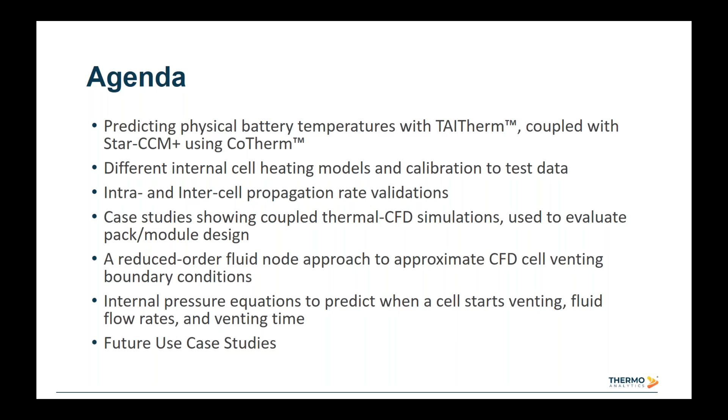Thermal runaway can happen when the battery temperature gets too high, either due to external temperatures being driven too high or from a sudden short circuit. And international law prescribes a minimum time of 5 minutes between the start of thermal runaway and for the car to catch fire, or for the thermal runaway event to pose danger to the occupants of the vehicle. So this requires proper thermal management and heat propagation management, both inside the pack and outside the pack.

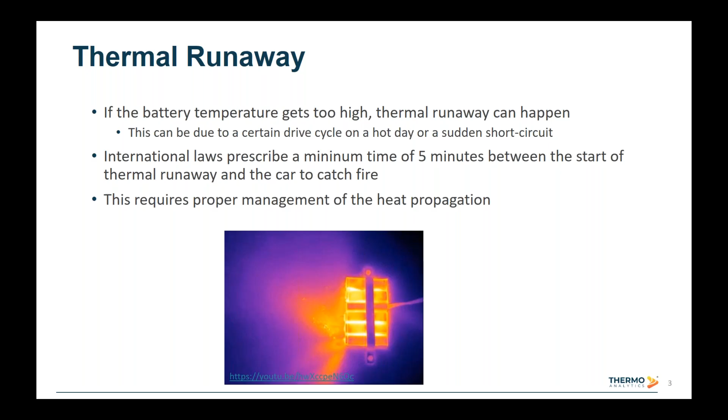There are two potential causes for thermal runaway. One is when the external temperatures are driven too high. The other is the short circuit causing rapid discharge and large internal heat generation. And some of the reasons for an internal short circuit are when lithium plating causes dendritic formation to puncture the separator, when the separator construction is flawed or too weak, or when it breaks down at high temperatures, or if the electrolyte is contaminated with metal particles.

And then there are also mechanical crush or penetration events that can occur. And some of these can be due to excessive voltage, excessive currents, overcharge, or low temperature operation or fast charging at too low of temperatures.

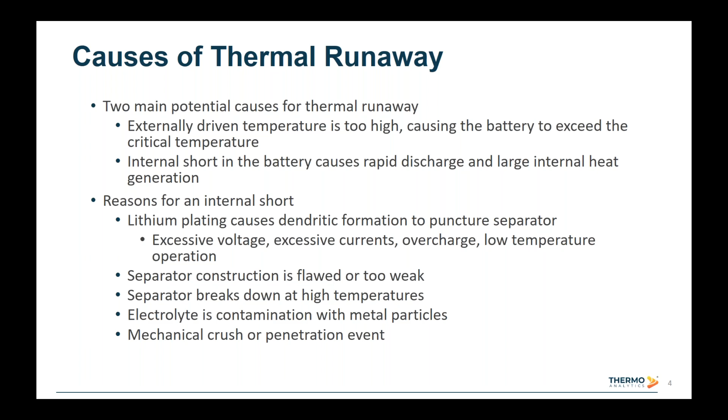We have 3 different internal cell heating models to predict the heat from chemical reactions during thermal runaway. And the elevated temperatures due to hot ambient conditions, I²R heating at shorts, or internal discharge can initiate the thermal runaway process. The models are based on temperature-dependent imposed heating derived from reaction kinetics. And the heat released by these reactions comes from the electrode, separator and electrolyte materials. These models use empirical reaction rate data and are used to evaluate risk of cell-to-cell propagation and evaluate runaway mitigation strategies.

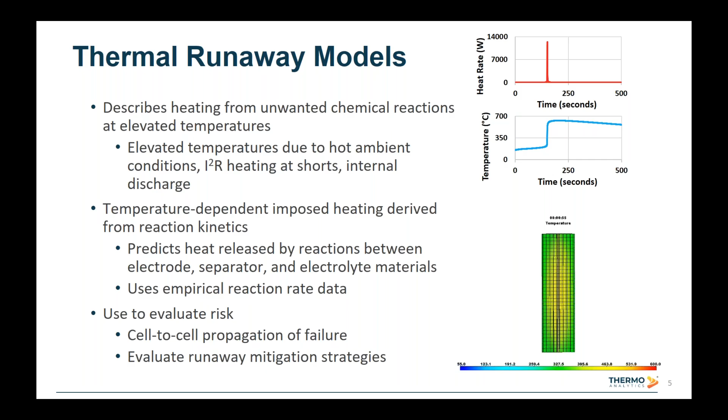The runaway models can be used in conjunction with any of the TAITherm battery models. They can include custom heating functions to simulate adverse heating effects such as shorts and hot gas impingement, as well as incorporating other heating scenarios such as rapid charge and discharge, environmental soak conditions, and cell-to-cell propagation of runaway via radiation, convection, and conduction.

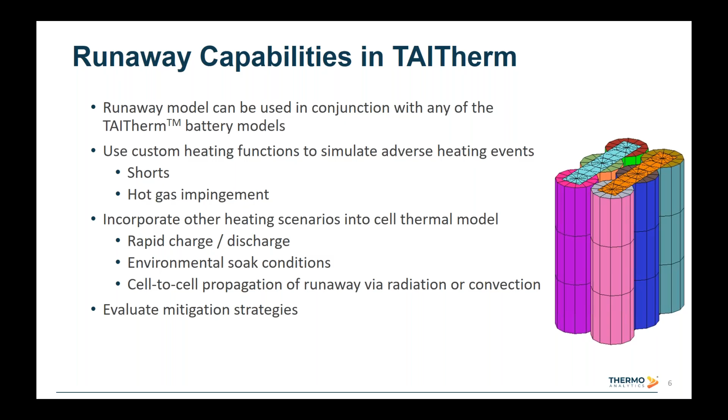The first internal cell heating model we have comes from NREL, which is the National Renewable Energy Laboratory. It uses empirical reaction data, such as data taken from calorimetric tests, and computes the rate of heat from exothermic decomposition reactions from 4 different types of reactions and superimposes those heat rates. And those reactions are based on the interaction and breakdown of the solid electrolyte interface, the anode and cathode reactions.

We can see here the equations for this model. Uses inputs such as volumetric heat rate. Actually, that's calculated. The inputs include the heat of reaction and then the battery composition and the rate of reaction. These are expressed in terms of activation energy, reaction rate constant, and gas constant.

This type of model can be difficult to calibrate, especially when you're trying to get a target total heat rate generated and the onset temperature for thermal runaway. But it does provide a higher fidelity physics model compared to other approaches, and has also been benchmarked against other modeling software and is used elsewhere in industry.

We also have a simplified version of this model with a single representative reaction, which uses the same set of equations, only with a single set of input data. And this does reflect some of the approaches taken in literature. So there are a couple variations here which can use this set of equations.

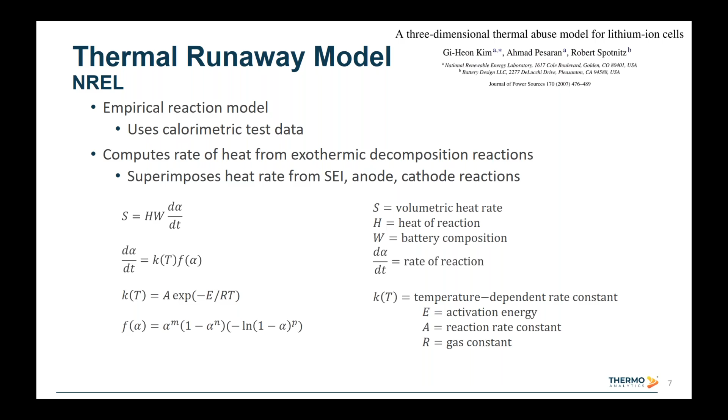We've also implemented a thermal runaway internal cell heating model from Zhao et al., which is a research paper which describes this model in terms of the equations used. This has been implemented directly in TAITherm and breaks up thermal runaway into 2 components: the short circuit that happens when the separator melts, as well as the chemical decomposition reactions inside the cell.

Each reaction uses a user-specified energy, a trigger temperature, and a gas release rate. And this model is also discretized to occur on an element level similar to the previous NREL models. This approach is simpler and easier to calibrate than the NREL method, but doesn't have quite as high fidelity if the test data that you have or the input data that you've derived from other sources does support that type of model. However, with the typical amount of data that people have without a cell teardown and calorimetric test, this is easier to calibrate to test data or expected results.

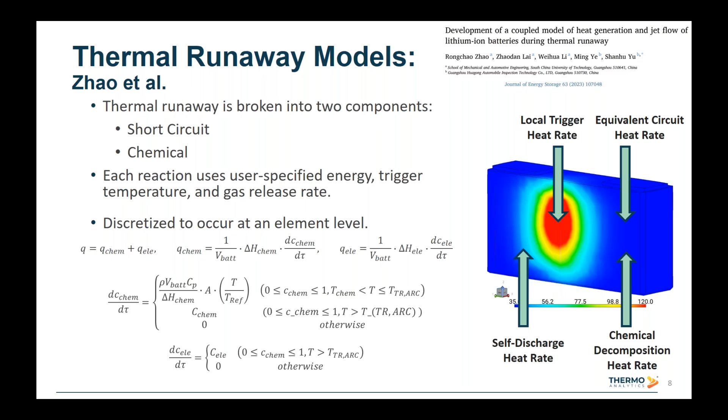This model includes a local trigger heat rate, an equivalent circuit heat rate, a self-discharge heat rate, and a chemical decomposition heat rate. As a validation of these approaches, we have compared this to a journal paper. This slide shows the initialization of the internal heating that generates the amount of heat required to start thermal runaway. The initial temperature is 55 degrees Celsius. We have an ambient of 35 with a heat transfer coefficient of 15.

And in the journal paper, 15% of the cell energy was released in 1 second to trigger the thermal runaway event. For the TAITherm model, we have imposed a 3 kilowatt heat rate that is also released in 1 second. And this is pretty close to what was done in the journal paper based on our calculations. We've used a spiral shell element geometry to capture anisotropic conduction through the jelly roll layers, and also to visualize the temperature and heat propagation inside the cell.

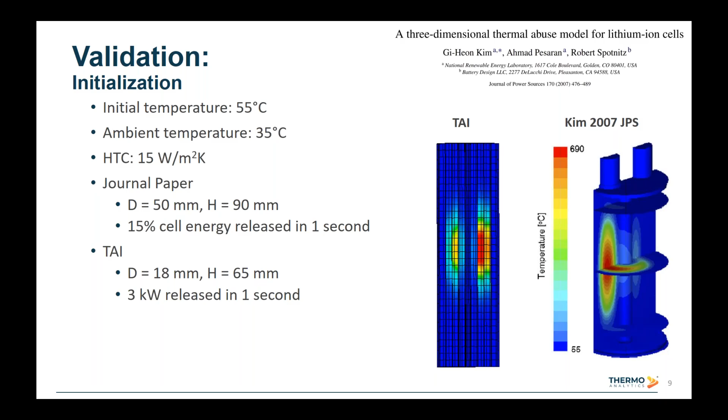This cell is actually a slightly different size between our TAITherm model and the journal paper, but we're using it as a qualitative analysis here to verify the model behaves as expected. So here we have the propagation rate inside the cell. The journal paper and the TAITherm thermal model have similar runaway characteristics.

There's a slightly different time scale, but what we're looking for here is just that the thermal runaway does propagate element to element as each one heats up and goes into thermal runaway, in a similar fashion between what's shown with other softwares and what's shown with TAITherm. So we see a similar propagation, and this is considered a validation of the intra-cell propagation rate, at least qualitatively for our models.

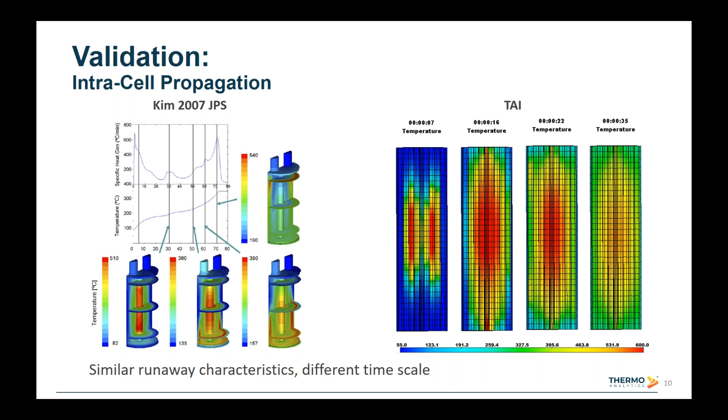We also have an inter-cell propagation validation where we've taken 3 cells and calibrated the inputs to match a different journal paper. This has a discretized reactive material, internal heating from the chemical reactions as well as the short circuit, convective heat transfer from CFD coupling, and a multiple time scale solution approach. And in this case, what that means is that the equations are solved with a smaller time step in our pressure and internal heating solvers, and then coupled with the TAITherm thermal model at a larger thermal time step to decrease runtime.

And there's also an internal pressure solver that calculates the mass flow rate and temperature of the venting material of each cell. And this includes conduction through the cell and pack, as well as convection from CFD and radiation from TAITherm.

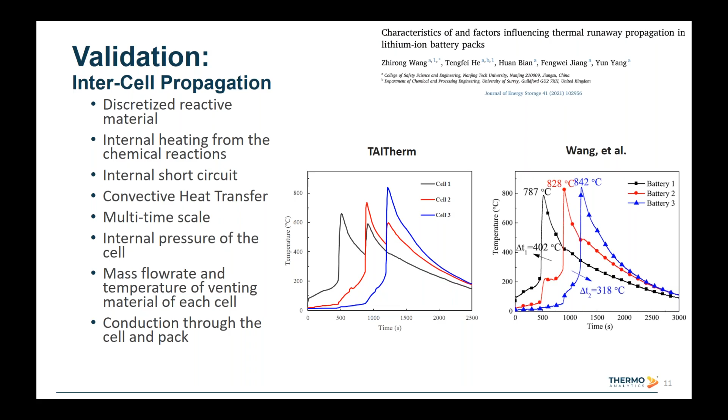We've done a case study in a module similar to the BMW i3, where there are 12 cells in series with 94 amp hour cells. There's a total of 44,000 elements in this pack. Library convection is used on the outside to represent natural convection. And then we have equivalent circuit cell heating until the runaway occurs. We have heating in bus bars, and then we have the thermal runaway internal heating equations.

So to precondition the pack, we have an alternating current here shown in blue, which then stops when the cell goes into runaway, and then we have the heat generated inside the cell at an element level.

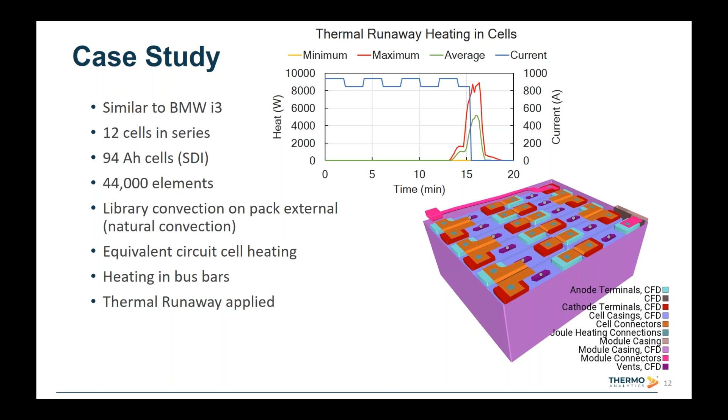Our CFD coupling approach here is shown for the 3-cell model, but it's the same for any of our geometries. The transient TAITherm thermal model calculates the surface temperatures of the cells, which then get exchanged with a steady state Star-CCM+ CFD model. That model calculates the heat transfer coefficients and fluid temperatures of not only the venting cell, but the surrounding cells. Those get imported back into the TAITherm thermal model, and that's run to predict the cell temperatures until a venting occurs, at which point we trigger the next CFD run and couple the surface temperatures, heat transfer coefficients, and fluid temperatures again.

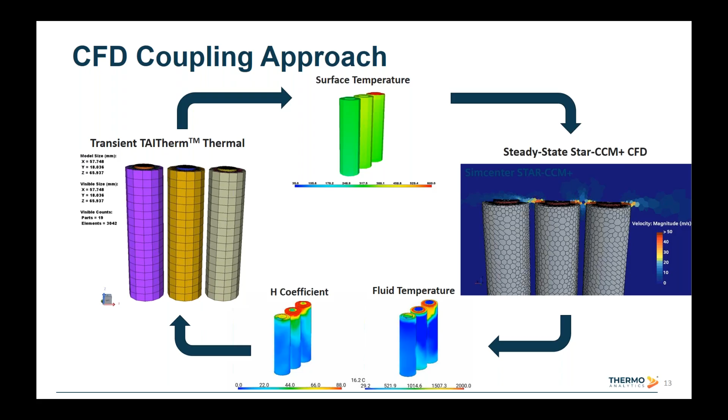The CoTherm process automation starts with a thermal transient in TAITherm until the venting phenomenon starts, at which point we couple with a CFD that calculates the heat transfer coefficient and fluid temperatures, which get imported back into TAITherm, which then runs in a standalone approach again until the next cell goes into thermal runaway. So this is faster than CFD only because the TAITherm thermal model runs faster.

And once a cell starts or stops venting, we trigger CFD again, and then exchange information with TAITherm, run it by itself again, and then this process continues as each cell starts and stops venting. And this can occur in any order and is fully automated.

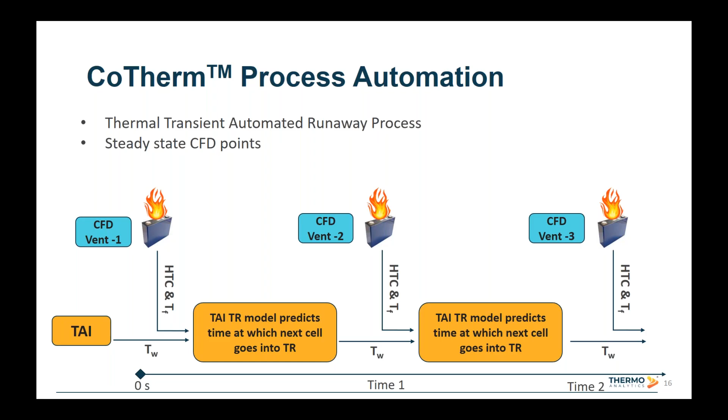To calculate the boundary conditions for the CFD model, we have an internal pressure solver based on a research paper by Mao et al. And this determines the fluid velocity, temperature, and duration of venting for each cell. It can be coupled with CFD or used in a standalone model, which I'll talk about later in the presentation.

And the CFD can be triggered under 2 conditions. One is a user-specified value, where you're setting the CFD boundary conditions based on these values, but for a user-specified duration. Or you can look at when these pressure or vent velocities go above a certain value or fall below a certain value.

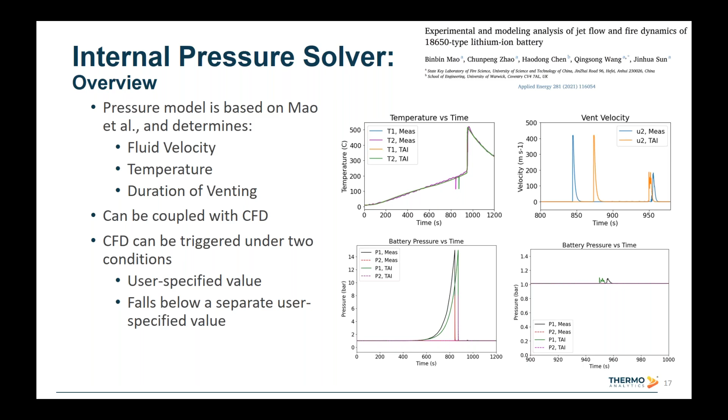Some of the physics behind this is that the pressure solver uses an inner time step, like I described earlier, to improve solution accuracy and runtime. The results are recorded and time averaged for the outer time step in TAITherm.

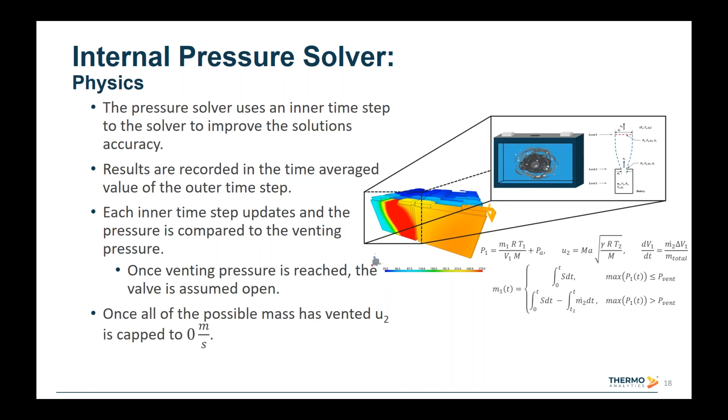The inputs to this model are typically derived from either test data or data that's been accumulated online. In this case, we're using inputs from the NASA database, and this is calibrated based on the equations shown here. The main inputs are the total energy released, and then the volume and mass of the cell or reacting material.

And the way in which thermal runaway is triggered does influence the propagation rate inside the cell and potentially heat transfer to surrounding cells. So it's important to consider how the cell is triggered when considering a propagation rate evaluation in the pack.

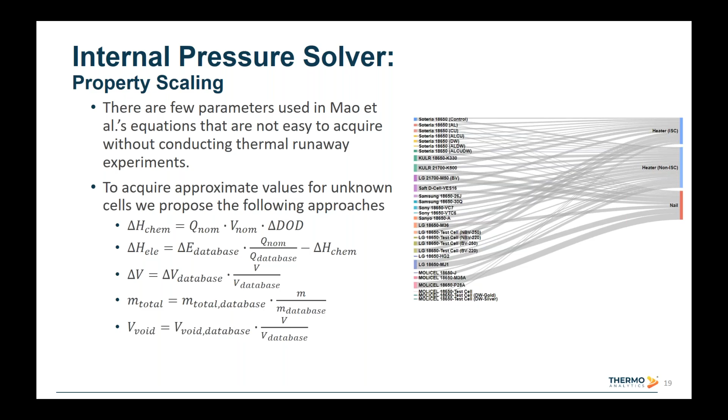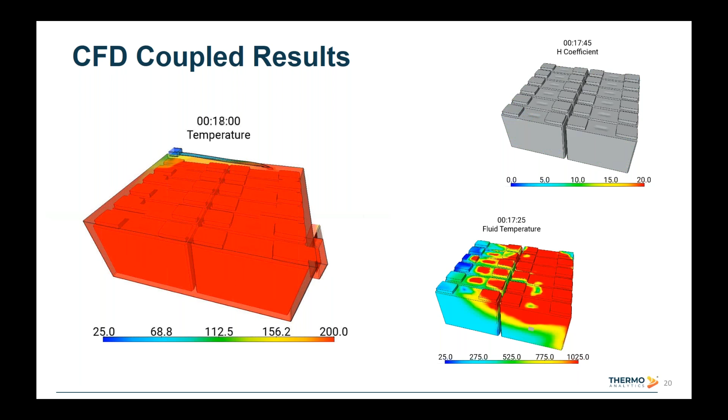We also have a reduced order approach, which is a fluid node proximity approach, where we've defined fluid nodes over the vents of each cell. And this approach approximates the convection that occurs when a cell vents, similar to what CFD does, but this is a simpler approach that can be calibrated either to test data or to a CFD model or a CFD coupled model. So this is a single transient model that runs in TAITherm by itself.

It has a fast runtime and requires minimal inputs that can be calibrated. The heat transfer coefficients and fluid temperatures are modified by TAITherm to represent local heat transfer to the surrounding cells. And the elements close to the vent receive higher values that automatically update when each cell starts and stops venting.

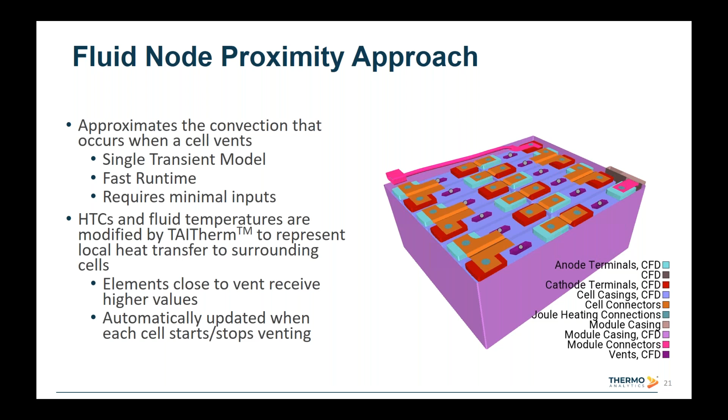However, the cells do fail in a slightly different order due to the dominance of conduction, in this case through the bus bars. This can be calibrated to rectify that difference in a further study. But the important thing is to have the same propagation rate throughout the pack, which is going to give equivalent boundary conditions to the surrounding geometry, particularly for heat protection studies.

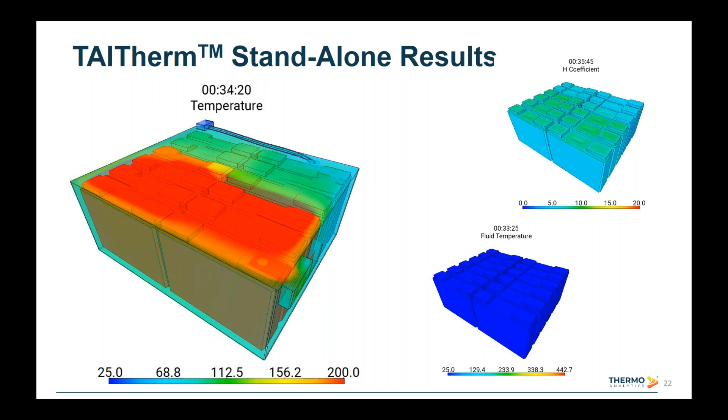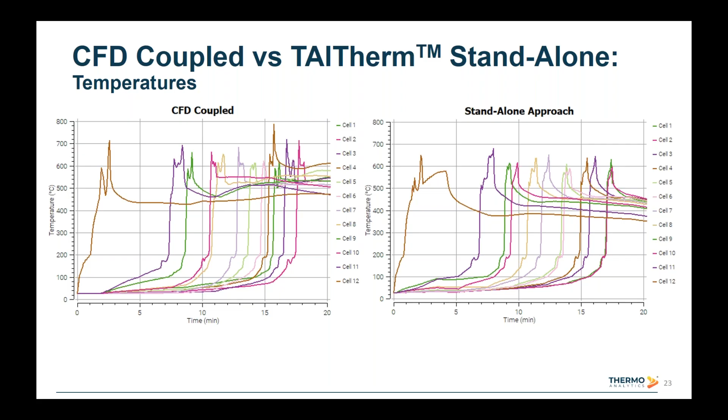Even though both solutions are faster than a CFD-only approach, it's very promising to see that TAITherm standalone can outperform a coupled approach in terms of runtime without sacrificing a lot of fidelity in producing the same propagation rate. It may require additional calibration and may need a coupled approach to inform the model parameters. However, runtime is essential for simulating large packs and full vehicles in one model, where designs can be modified to ensure safety, quality, and reliability.

In terms of the runtime for the CFD coupled approach that I've described earlier, we're looking at a 97-minute runtime to simulate 1 hour in the simulation, and this is run on 24 processors. The standalone approach also simulates a 1 hour simulation on 24 processors. However, the runtime in this case is only 20 minutes. So that's 3 times real time.

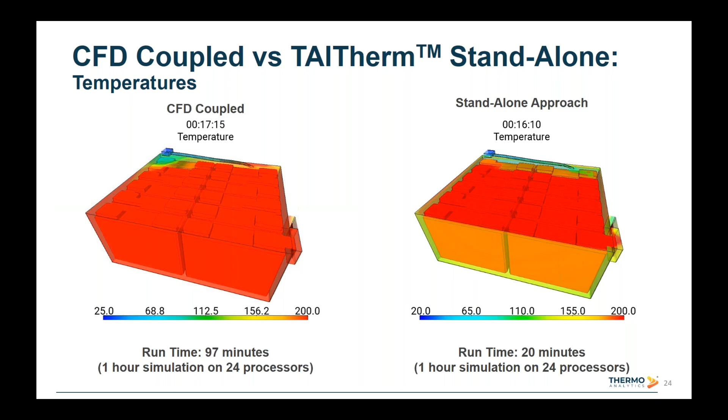We can also output mass flow rate as an alternative. So there are 3 different inputs that could be used as boundary conditions in the CFD model: the pressure, the velocity, or the mass flow rate. And there's simply 3 alternatives that could all be valid, but some may be easier to implement than others.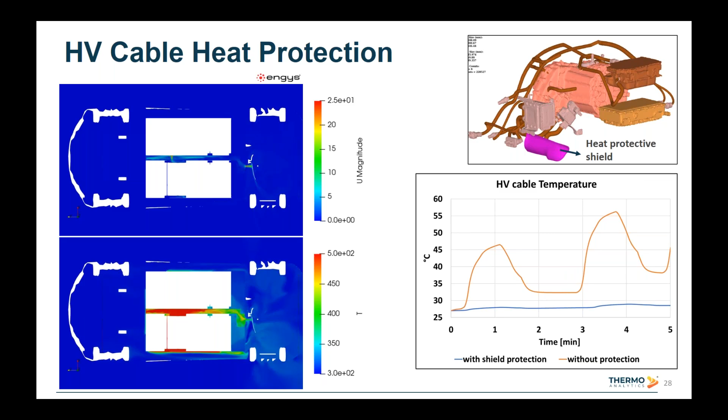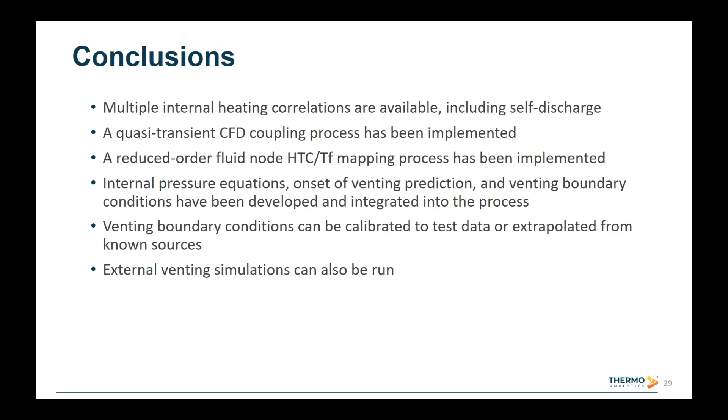Can this process be used with other CFD software tools? Yes, we do have this implemented with other CFD software tools. In this case, we've used Star-CCM+ for most of these case studies, since it is an industry standard, and that's just typically what we use here. We've also done this with OpenFOAM and ANSYS, and we do have standard processes for coupling with other CFD softwares.

Next question, can the cell venting pressure equations be used on a module level or pack level? Yeah, this is something we're looking into right now. Right now, they predict when a cell starts and stops venting. They could also be used on the outside of the module to predict when the burst disk starts venting on the module and going into the channels of the pack.

It could potentially also be used for the entire pack to predict the boundary conditions of the pack when it starts venting. However, it is dependent on the cell-to-cell propagation rate. So it's something that could be useful, but would probably need to be calibrated to a larger thermal model or a module thermal model. And then those equations could be used on an external heat protection study.